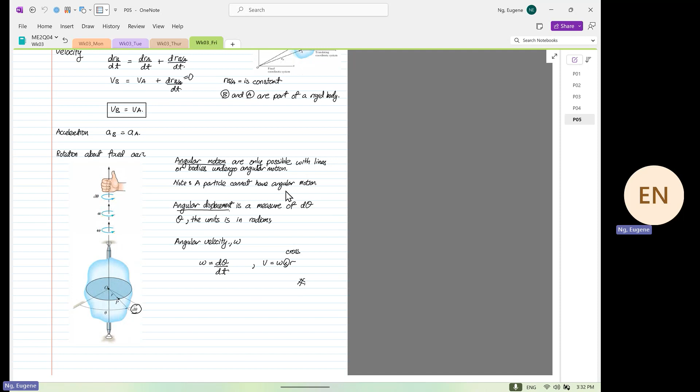So we are going to look at the rigid body planar motion, and on Friday last week we stopped at angular velocity. Okay, we stopped at angular velocity. So one thing to highlight over here, right? This is not times. This is cross. We are going to do vector multiplication later on. Okay. Right. So today we're going to continue the lecture from here.

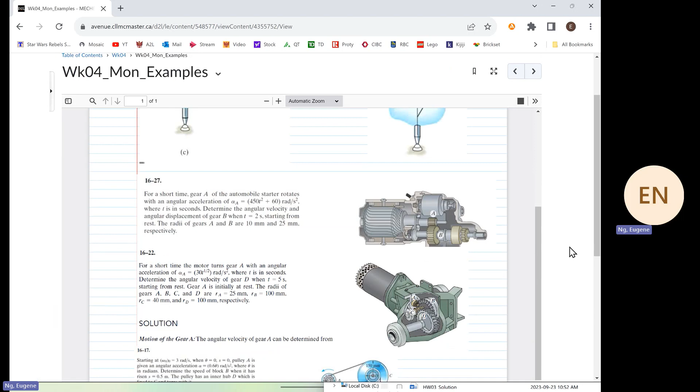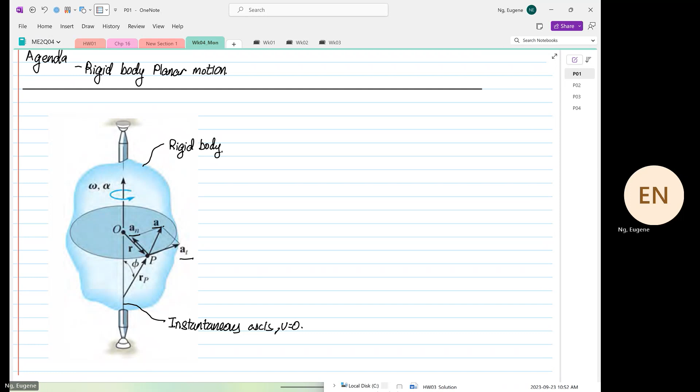The entire body is rotating about an axis down here, which we like to call an instantaneous axis. Okay, it's an instantaneous axis, i.e. the velocity on this axis is equal to what? 0. Okay, so that is it. So now if we were to focus on acceleration, if we were to look into angular acceleration, okay, if we look at the formula for angular acceleration, we know that alpha is equal to d omega over dt, where alpha is the angular acceleration.

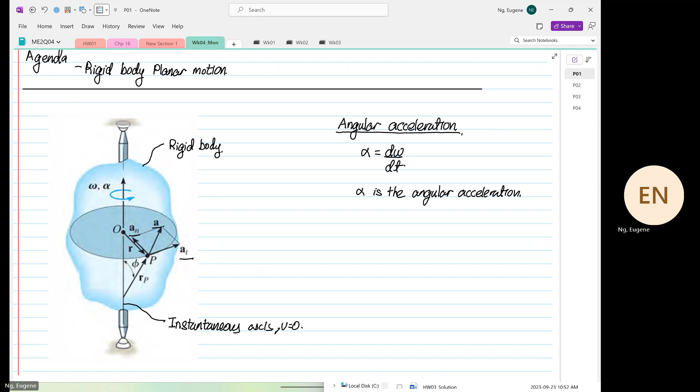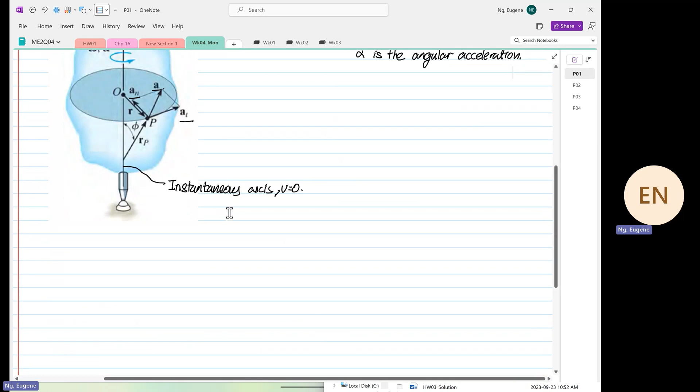Okay. Before we go there, you have to also refer to this diagram. It's not critical, but you have to refer to both diagrams when I'm teaching. So it's the other diagram, the one with the thumb. Right. So alpha is the angular acceleration, and it can be also expressed. We know that omega is also equal to d theta over dt. So from here, we know that alpha can be written as d over dt of d theta over dt. So this will be d squared theta over dt squared. Okay, so we have the expression.

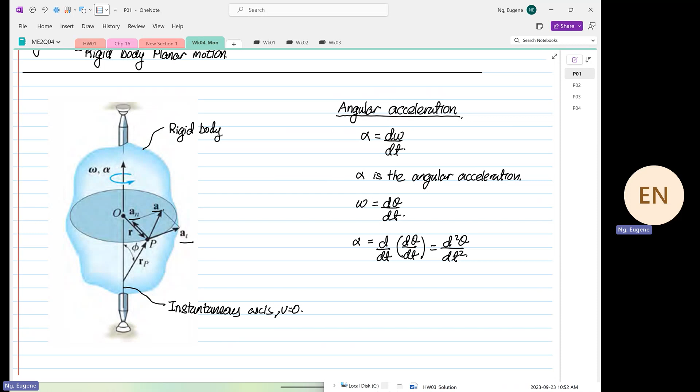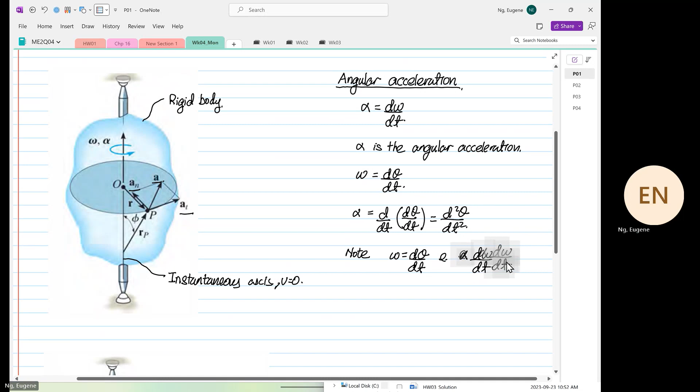So now if we look into the equations, note, right? If we were to focus on the expression where we have omega is equal to d theta over dt, and we also have the expression where we have alpha is equal to d omega over dt, right? So I'm going to address this as equation number 1, and this as equation number 2.

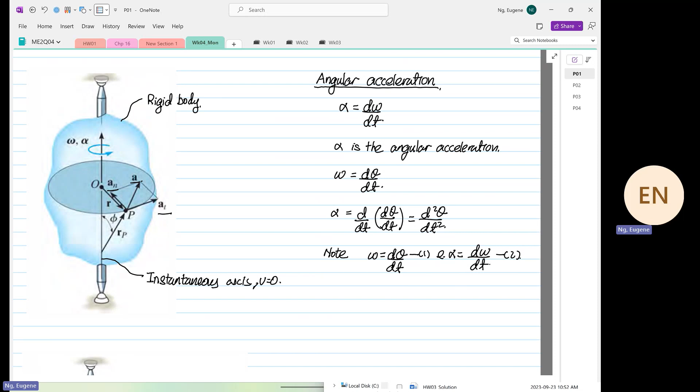Oh, yeah, there's an equal sign missing. Thank you. Now, is my handwriting visible today? Are we okay? You all can see? Good. I try to slow down a bit and write properly, okay, better.

So if you look at equation number 1, it's very obvious that dt is equal to d theta over omega. And then if we were to look into equation number 2, we know that dt is also equal to d omega over alpha. So from here, we equate equation 1a and equation 2a.

Okay. So what we have is d theta over omega is equal to d omega over alpha. So in this context, we have a new expression where the angular acceleration d theta is equal to the angular velocity d omega.

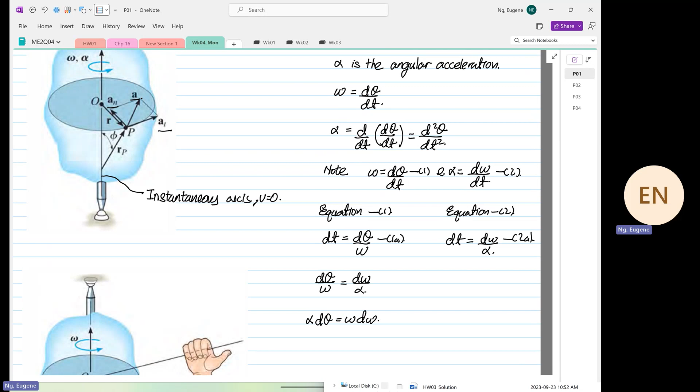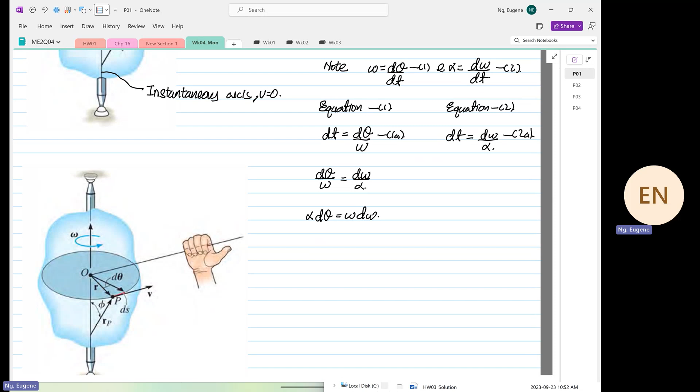Any questions so far? Okay, let's look at one example, example number 1. There is a lot of theory we have to go through, but I don't want to go through a bunch of theory and then we don't know what is going on. Let me go into some examples because what I'm teaching is not that difficult. This is on Avenue to Learn. So this is our example number 1.

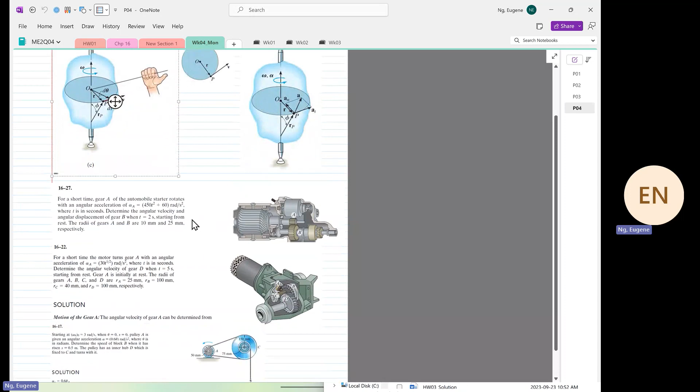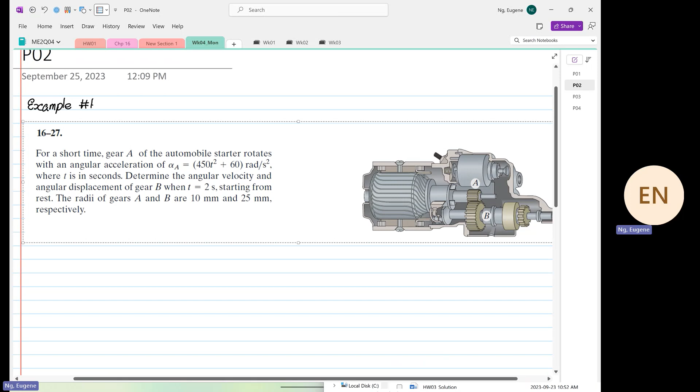When I look at a diagram or figure like this, I also get very confused. I repeat again, I get very confused. So it's okay. The only way not to get confused is to learn how to isolate the problem. So for a short time, gear A rotates with an angular acceleration alpha A equal to 450 t squared plus 60 radians per second squared.

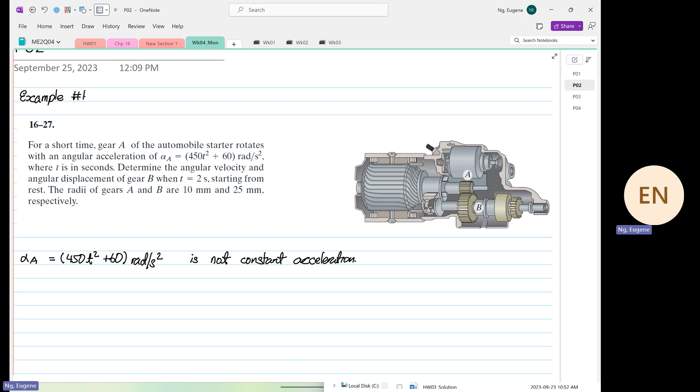Okay, so we know that this problem is not what? Constant what? Acceleration. So you cannot use the famous three equations, yes or no? Right, you cannot use the famous three equations. And t is in seconds.

Determine the angular velocity and angular displacement of gear B. So we have to determine omega B and theta B at time equal to 2 seconds, starting from rest. The radius of gear A, RA, is equal to 0.01 meters, and RB is equal to 0.025 meters.

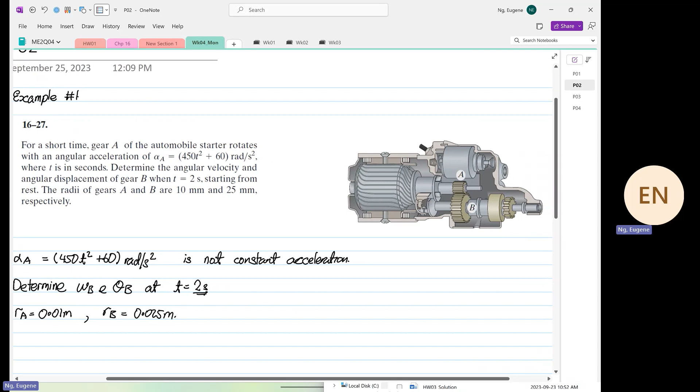So the first thing I want you all to do is to concentrate on the gear. This is the information that's given. It looks really, really messy over here, right? But the only thing we have to focus on is this section over here. In this section you have gear A and gear B. And I want you to have a habit to draw your transformation.

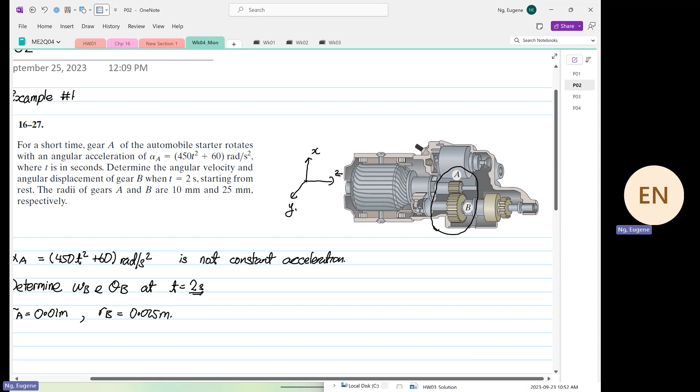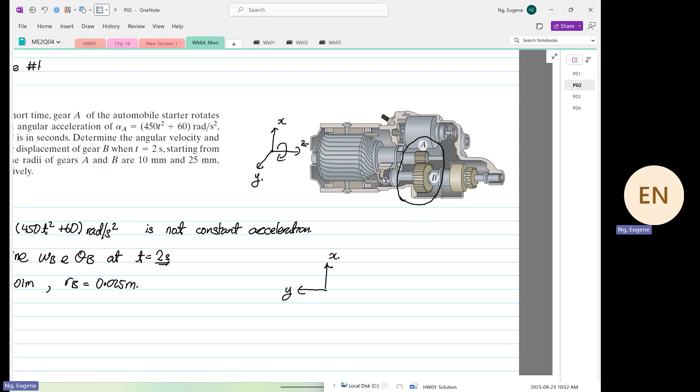So from here, I'm going to draw. Remember, our paper is in 2D, so we have to be able to visualize this in 2D. So I will now start to construct our view where this is our X, this is our Y, and this is our rotation about Z. We like to look at gear A and gear B. So now I'm going to isolate the rest of the diagram that is just noise and just focus on 2 gears.

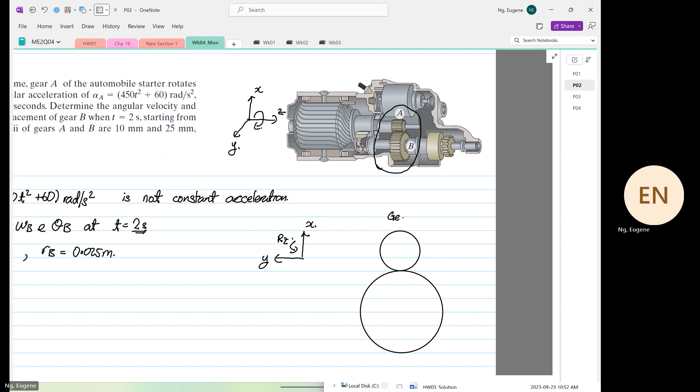This is our gear A. And the next one I will deliberately draw bigger. This is our gear B. So over here we label gear A, and over here gear B. For now, this question looks for magnitude, so it's easier. Later on, when we start looking for vectors, it gets more complicated. So we call the rotation over here omega A, and this is the center. We have another center over here. If omega A is in that direction, this is omega B.

And exactly where you have the contact over here, it's moving at a velocity v. Yeah, I'll call it v.